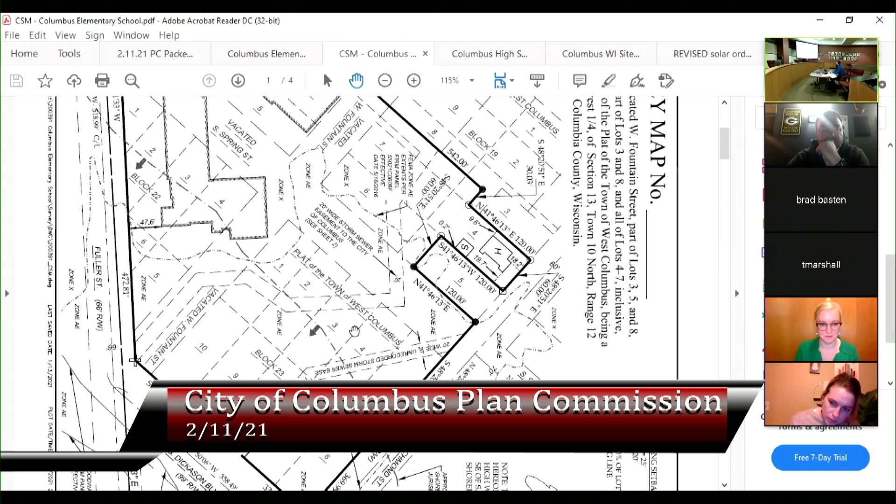Basically, the one thing I wanted to show the group was there was a storm sewer that previously ran through the elementary school site, identified in the 2014 parking lot project completed by the school. However, we were out and about and found an existing storm sewer that most likely ran down Fountain Street, was relocated when the school addition happened, I think back in the 60s, and was never recorded. So thankfully the project team was able to map it and provide an updated, and actually create an easement for the storm sewer that had basically been in existence for, I don't know, 40 years. So that is on there.

The other thing I wanted to note is you'll notice that there's floodplain shown on the CSM that was requested, and the school has already obtained a conditional LOMAR or LOMA from FEMA.

So essentially, what will happen is they'll go forward with the project. Pending approvals, they'll build the school, and then go back out and reshoot the grades to verify that they built at the correct heights out of the floodplain. The base flood elevation there is 840, and on their grading plans everything's at least 842 or higher.

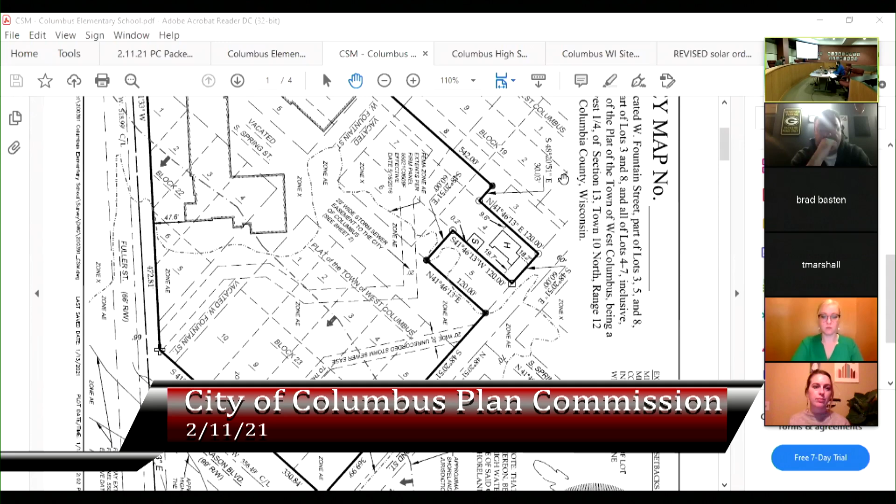I didn't see any comments from staff or the consulting engineer. I'm assuming all those have been addressed. Yep, we've been through that. Jason did have some comments and they've been addressed.

All right, I have no questions. Other commissioners, any questions about the certified survey map? Hearing none, the agenda item is to make a recommendation to the Common Council regarding the application for the certified survey map.

I'll entertain a motion to either recommend approval or recommend denial to the Common Council. I'll make a motion to recommend approval regarding the application by the Columbus School District for the proposed certified survey map for the Columbus Elementary School located at 200 Fuller Street. I'll second that motion. All right, I have a motion and a second. Any further discussion?

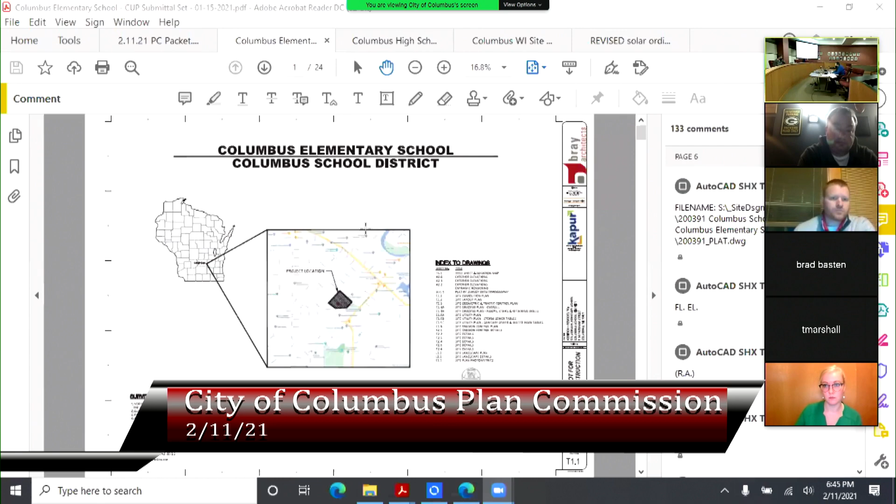Thank you, Matt. All right, with that, I will open the public hearing regarding this request. At this time, any members of the public that have comments or questions are allowed to speak.

I'm hearing none, so I will call for a second time if anybody wishes to speak on this proposal. Was that a hand raise? No. Okay, I'll call for a third and final time, if anybody wishes to speak on this proposal before I close the hearing.

All right, hearing none, I will close this public hearing and move on to 7C, which is the commission's opportunity to deliberate and make a recommendation to the council regarding this request. Commissioners, any questions or comments?

Before that, I can go through the site plan, but we also have their project team here. Pretty much all of them are present, and also the superintendent of the school district is here. I think Troy, the building and grounds supervisor, is also here as well. So please let me know how you want me to proceed.

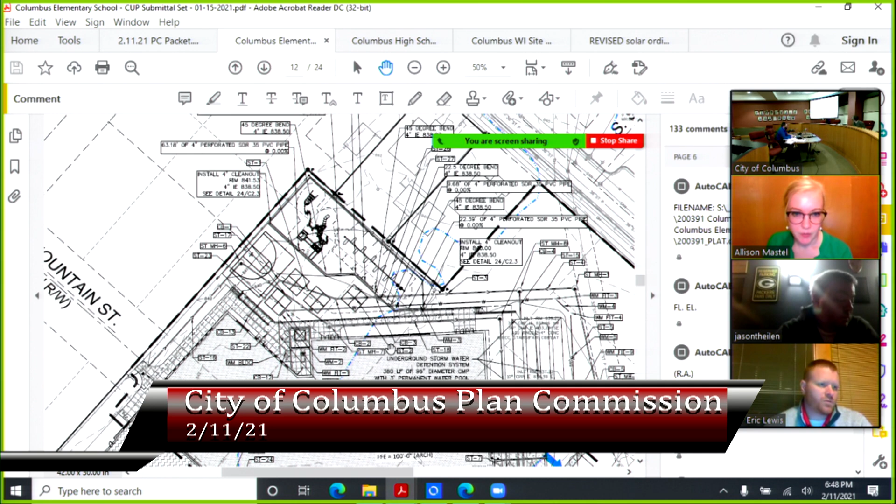You can see the paths, and there's some ramping there due to the elevation changes. That was always part of the project, but it has just slightly shifted the location of it. And that came from our discussions with the city, as just mentioned before.

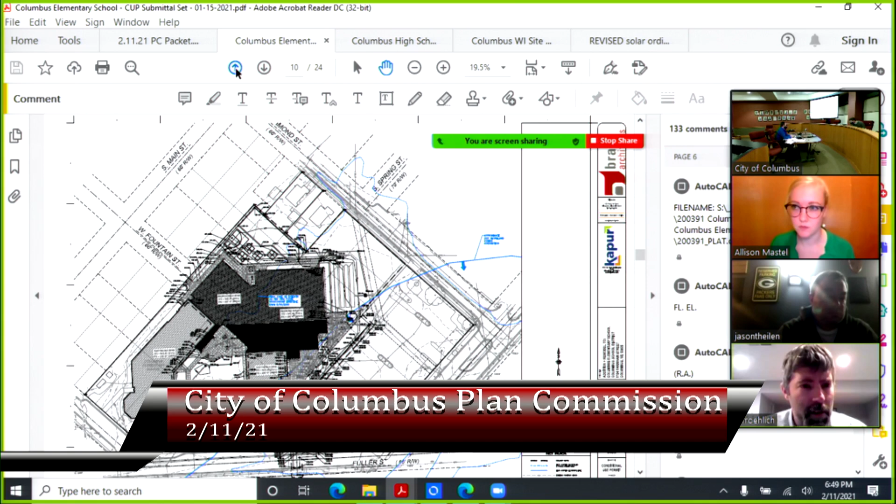This is Mike Froehlich with Kapur and Associates. Just to add to what Allison mentioned about the site grading - as everybody's aware, the school actually falls within the 100-year floodplain. As part of the city's shoreline zoning, in addition to having to raise the building 2 feet above the floodplain elevation, which we're doing because we're matching floor elevations - the floodplain's at 840, the building's at 842.40, I believe - so just by matching those floor elevations, we'll be out of the floodplain.

However, the shoreline zoning for the city requires that elevation is maintained a minimum of 15 feet outside of the building envelope. So originally with the project, we wanted to tuck the ramps and staircases going back down to grade to the playground a little closer to the building, but with that 15-foot requirement, it held us out there. So there's a little bit of open space outside the building, particularly on the north end of the gymnasium. Otherwise, we would have snugged that up closer to the base of the building.

Another item brought up in review comments from the city engineer is on the northwest side of the site, where Fountain Street basically comes to a dead end at the school property. There is some off-site drainage that enters the school property from the back side of the residential lots. So one thing not yet reflected here is we're adding two inlets on that side of the school site to pick up that water and reroute it around the school through our underground detention system. Previously, that water had meandered through the site from northwest to southeast and entered the existing storm sewer system by the school parking lot. However, with the building cutting that path for water off, we're now going to pick that up via storm sewers.

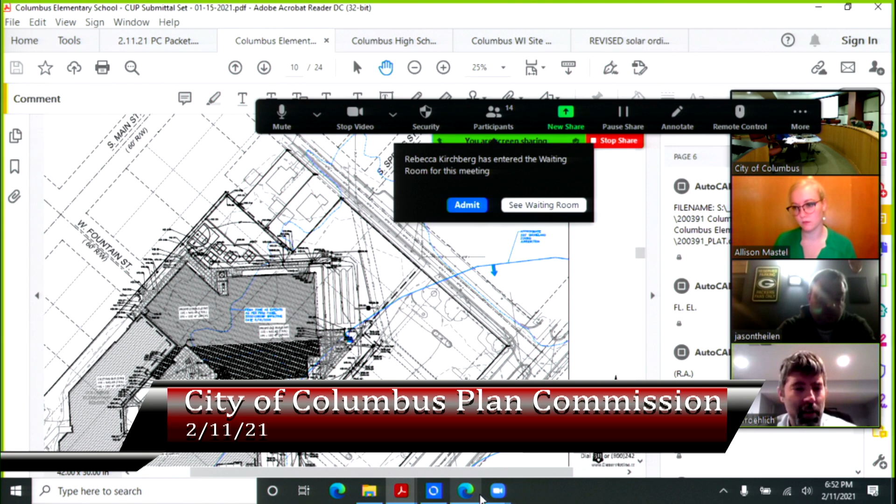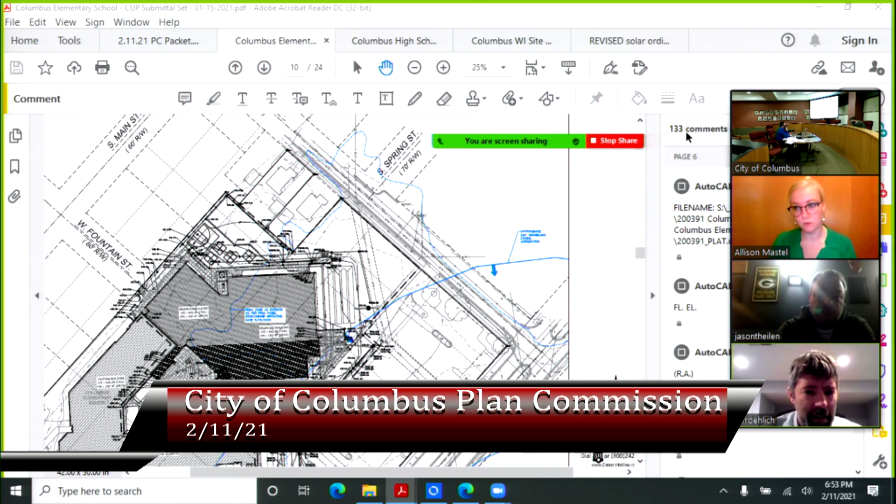The reason for that permanent pool is we need to get our settling to take place within that water. It's basically what you'd envision as a normal detention pond, but it's in pipes underground. Those pipes fill up during storm events, and we've got an outlet structure that holds that water back and releases it at a lower rate.

Just trying to think about what else. As with the building addition, we're going to create an enclosed courtyard area.

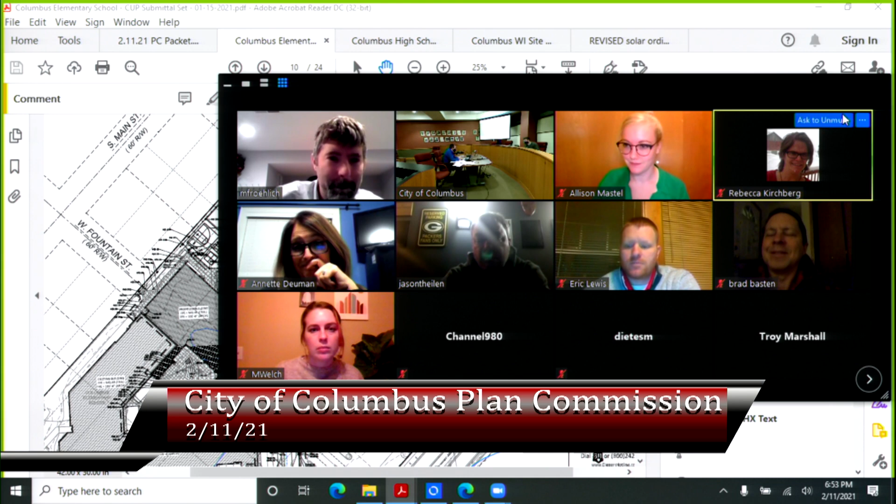Sorry about that. With the courtyard that's going to be created, it's basically going to function as some instructional space with some tiered concrete seating, so they can have instruction outside. In addition to the instructional space to the south of that, the plan is for some poured-in-place rubber soft surface that'll also function as additional playground equipment for the younger grades.

As part of the stormwater management, since we're enclosing that area and don't have any overland flow path to exit water in case of a heavy storm event, we've sized the storm sewer pipe exiting that area, which will run underneath the new building addition to the underground storage system, for a 100-year storm event. Typically with storm sewer, you design for a 10-year storm event, and anything in excess would flow overland. In this case, since we don't have that, we're sizing that storm sewer larger than would typically be the case to help ensure we don't have water backing up or creeping up to the floor elevation of the building.

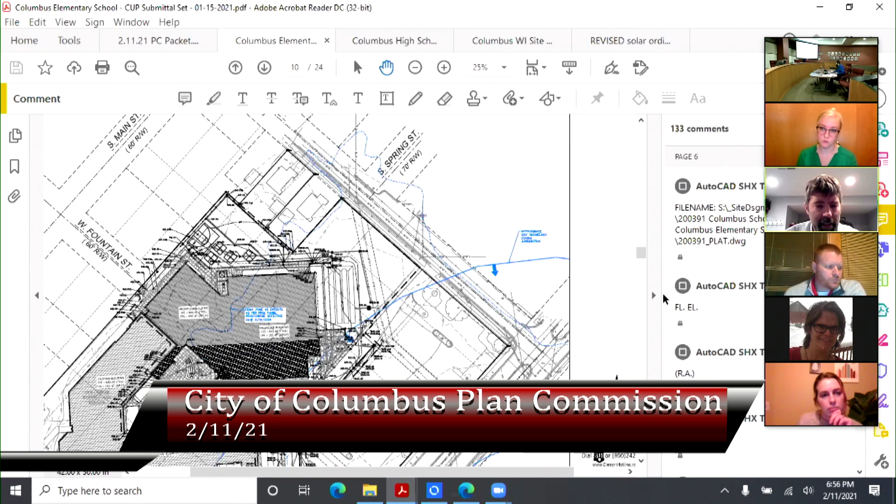In addition to that storm sewer, the new water service for the building will come in on the north side. We're bringing up a new water main from Fuller Street on the south, and that'll run all the way around the building to the back side by the playground area and enter the building at the back entrance. We're also installing a new fire hydrant located off the southeast corner of the building addition on the front side of the school, so we're able to have ample fire protection for the school building.

I think those are all the major points. I'd be happy to answer any questions anybody has related to the site or stormwater management.

This is Brad Basten. What is the projected impact for parking, impact on the neighborhood with this expansion?

Well, there's no decrease in the amount of parking on the school site. None of the work will affect or take away any existing parking. As far as parking on the neighborhood streets, no analysis has been done to that effect. I'm not sure if the school district can touch on what they anticipate for increased enrollment and/or increase in staff as a result of this expansion project.

Sure, I can talk to that. Thanks, Brad, for the question. As City Council, or Planning Commission, I'm not sure if you're aware, but really what we're doing for the school district is moving our current K-5 into the new elementary. The students we currently have on site for the middle school, intermediate, that building is moving over to the elementary. It's the same staff that we currently have sharing that parking space, and the same parents and students—they're just going to go into this building, which is on basically the same site. So we don't anticipate any differences in parking needs for staff or for parents.

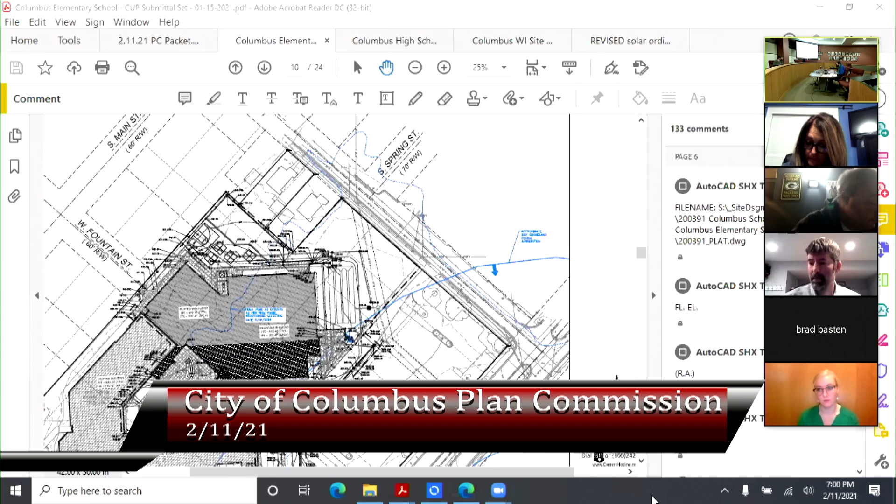If someone's making a motion, check your mic. This Jason froze up. You having technical difficulties? Oh, there he is.

I'll make a motion that we recommend to the council approval of the request of the Columbus School District for a conditional use permit to construct a building addition to the Columbus Elementary School located at 200 Fuller Street.

I'll second that. All right, I have a motion and a second. Any further comments or questions from commission? Hearing none.

All those in favor of recommending to council approval of the conditional use permit signify by aye. Aye. Aye. Opposed? All right, recommendation for approval passes.

All right, second verse, same as the first here, looks like. Item 7D, public hearing regarding the request of the Columbus School District for a conditional use permit to construct a building addition to the Columbus High School located at 1164 Farnham. I did this a little backwards, I think, last time.

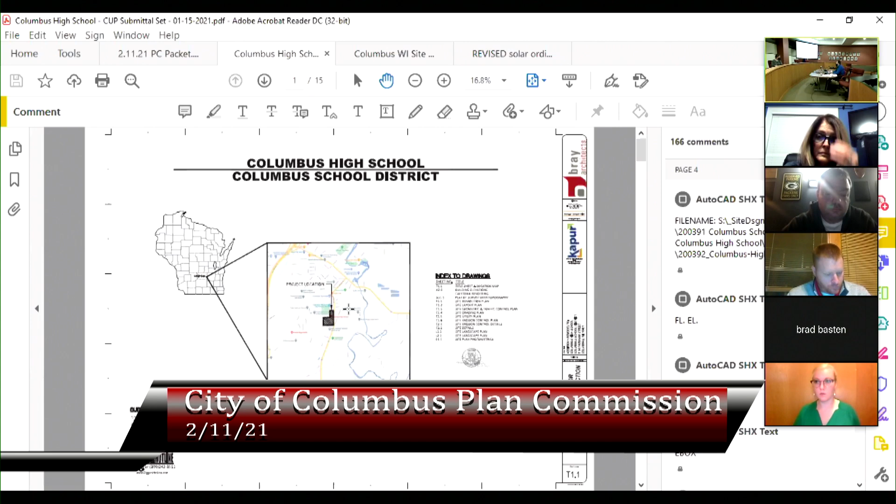We should probably have somebody present the site before the public hearing, so let's go ahead and do that. I gave an overview of it. I'm not sure what you're- so this one is, also, another project we've been working with the school district on.

Much less complex. You don't have to go through the CSM or vacating right-of-way or finding hidden storm sewer. So this is essentially a small addition compared to the elementary school, to the front of the building, kind of where the arc comes up in front of the high school.

Basically, an addition that sticks out, and there will be reconfiguring of the driveway in front of the school. This is also zoned R2, our medium density single-family zoning, and once again it's a conditional use under that designation. To your point, Uriah, that's what triggered the need for the conditional use and our list of required site plans under the zoning code.

So with that, you can open the public hearing and see if anybody has comments about the proposal at the high school. I should also note this has been posted and noticed in the paper. I did not have anybody call me to see the plans or ask questions, which I figured somebody would be curious about, but that did not happen for this one - I should have mentioned that before the public hearing for the elementary school as well.

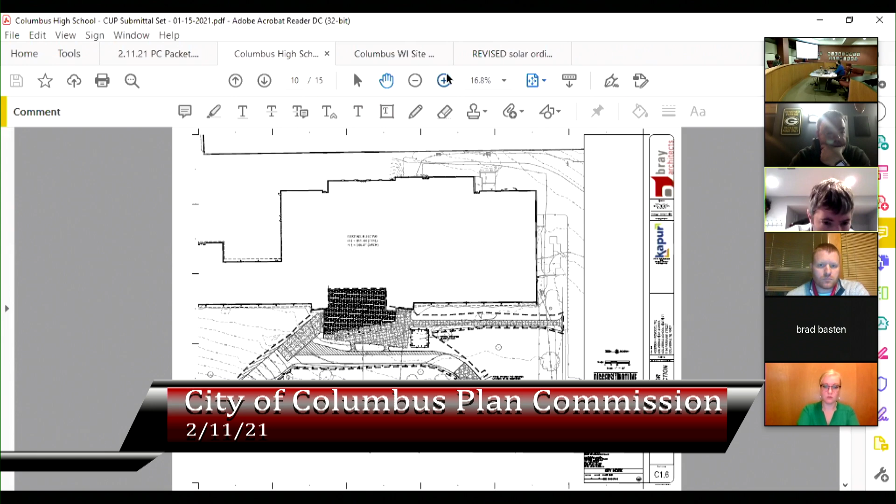Yeah, as you get down to that exit driveway — let me open up the drawing right now — but I believe it's around 6 to 7%. I know by the loading dock area, where you can see the darker hatch, the concrete area, that's roughly at 4%, so I think we're probably at 7% or so.

Basically, what we did is maintain the existing slopes on the driveway that's out there right now, because where we're exiting is over the existing pavement of the driveway. So the grade on the exit driveway, or south driveway, will be basically equal to or less than what currently exists.

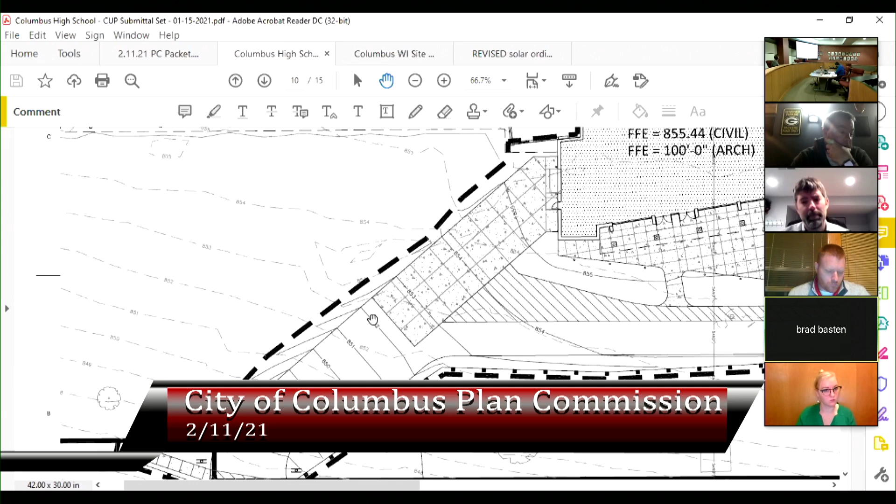Okay. The building still appears as if it's maybe 60 feet back from the right-of-way? Yeah. Okay.

Okay, yeah, just visualizing it — essentially the addition takes up the space the canopy takes up now, more or less. More or less, yes. Okay.

Any other questions, commissioners? All right, hearing none, I'll entertain a motion to make a recommendation to the council to approve, grant, or deny the conditional use permit for the high school addition.

I'll move to approve the conditional use permit for the addition of Columbus High School to the city council.

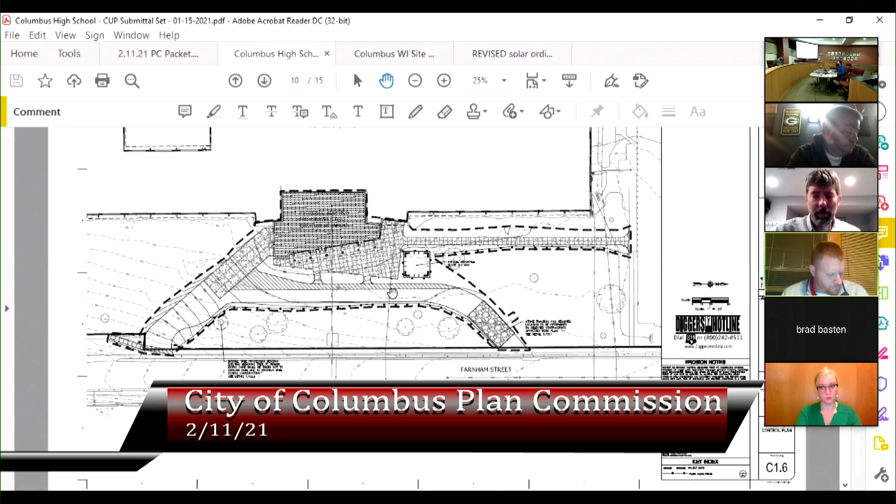I'll second. All right, I have a motion and a second. Any further question, discussion? Hearing none, those in favor of recommending to council approval for the conditional use permit for the high school, please signify by aye. Aye. Aye. Opposed?

None. All right, before we move to the next meeting, I wanted to let everybody from the school know that this is going on Monday, the 15th. This meeting was scheduled for the 16th, but there's an election that day, so they moved it up a day. I just wanted to make everybody aware of that. It's already on the agenda.

The agenda, I think, is either posted today or will be posted tomorrow, and there will be Zoom information on that agenda. I can send it out to the group. And then it would go to the following council meeting for approval, which would be March 2nd. Just wanted to let everybody know, okay? All right, you can proceed.

All right, item 7, what are we on? F, 7F. Public hearing regarding the request of Cave Enterprises Operations LLC for a conditional use permit to construct an additional drive-through facility on parcel number 11211-908.04, located at 101 Dix Street, AKA the Burger King, right? Correct. All right.

Again, before I open the public hearing, maybe it's worth giving a brief overview. Right now is the current site plan that they submitted. You can zoom in, you can kind of see. So right now they have one, they've been approved for one drive-through.

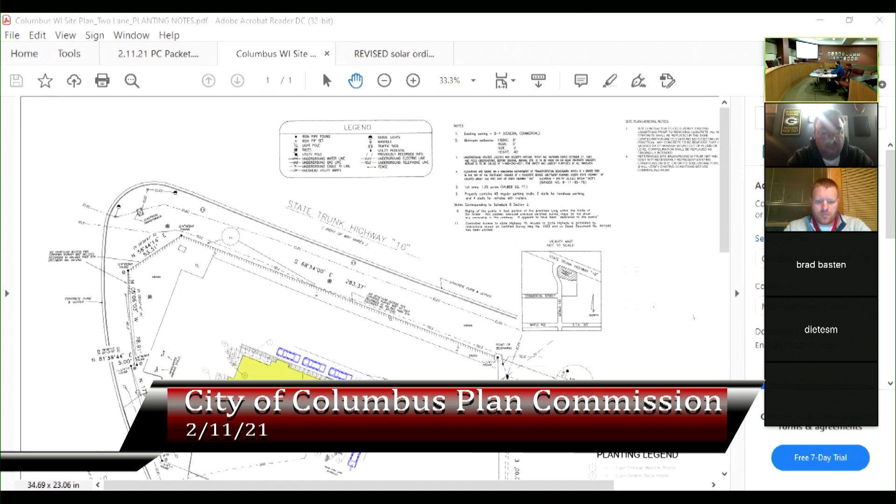All right, hearing none, I'll close the public hearing and move on to item 7G, which is commission deliberation and recommendation to council regarding the conditional use permit. Commissioners, any questions? I guess I'll interject here since...

Leading up to this, I ended up with a rather substantial question regarding their site plan. If you look at the site plan, it shows this is the property boundary, but when you look at the GIS, which I'm pulling up here in a moment, you will see that the property boundary is actually different. Essentially what happened was, as part of the James Street project in 2016, the city acquired a parcel of land from the previous owner, which isn't the current owner of this property. And it is unclear to me what kind of agreement the city has in place at this time with the property owner when it comes to parking or any other encroachments that may be on the city property.

So my request to the Plan Commission is to table this. I wanted to have the public hearing because it was already noticed properly in the paper, and essentially request that we table this until the following month's meeting where I can clarify some of these issues, and then recommend some sort of approval or denial for this. Because... so let me...